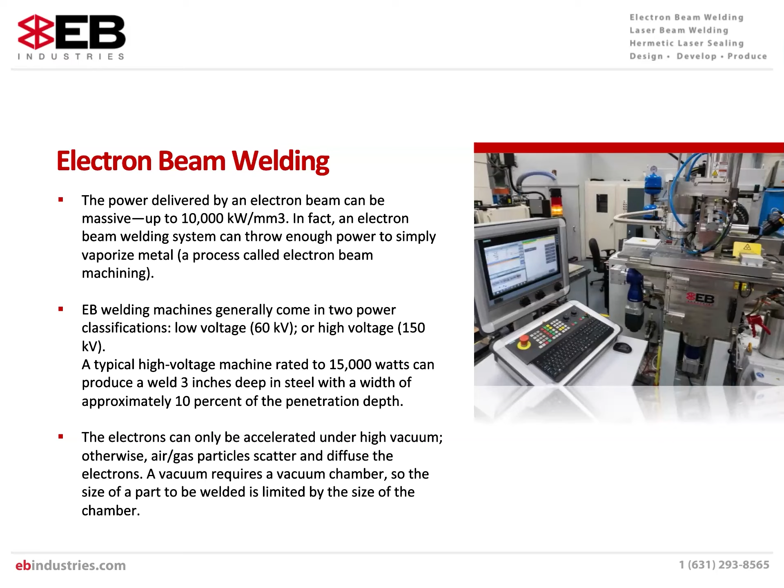The use of the vacuum, as well as the ability to eliminate the scattering of electrons and oxidation materials that can damage the weld itself, also produces radiation. That is why the handling must be done inside of a chamber, which is typically controlled externally using CNC tables.

So the EB welding, because of all this technology, the high voltage machine and the vacuum chamber itself, must be done with a well-trained and skilled operator, along with an engineer and an inspector. There are also typically maintenance technicians that we have on staff to make sure that the machines are operating efficiently and limiting downtime as much as possible.

These machines are typically in the millions of dollars, and the support to keep these machines running is very extensive, especially if you are relying on outside vendors to help with the maintenance of your machines. So when you have jobs that are as critical as ours, that are required to be delivered immediately, we cannot afford to have our machines down, which is why we have several engineers on staff working around the clock to keep our machines up and running and maintained properly.

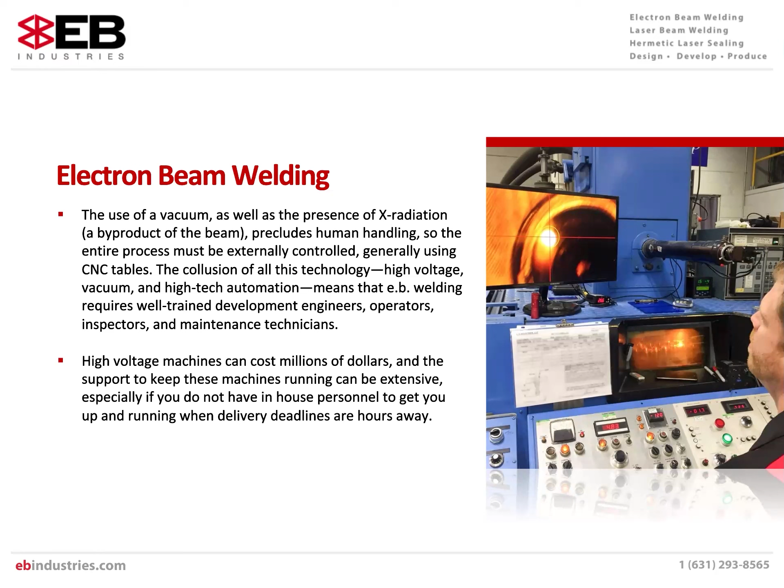To summarize the science of electron beam welding: free electrons flow through a tungsten filament. This is done under vacuum by accelerating the electrons with a high voltage power source. Their path is controlled through magnetic lenses that can deflect the beam or control the shape by controlling the diameter, done through a narrow adjustable cone. By colliding the electrons with metal, the kinetic energy is transferred into heat on the workpiece, therefore producing a weld.

The success and quality of the final weldment depends on proper joint design. Along with the joint design, we also have to make sure that the tooling is made with proper design limitations, because the ability to manipulate the part inside of the vacuum chamber is very, very critical. The tooling also acts as a heat sink to minimize shrinkage and warping by controlling the heat going into the part. The tooling can also be designed to shield and protect exposed wires and sensitive components against vapor and weld splatter.

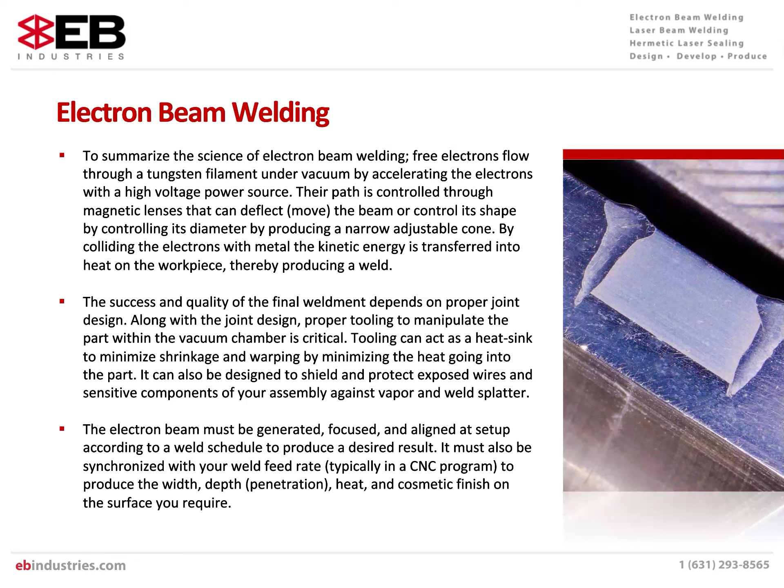The electron beam must be generated, focused, and aligned at setup according to a weld schedule, which is developed to produce the desired result, always designed by customer specifications. It must also be synchronized with things like feed rate to produce the width and depth, which is the penetration, as well as the heat input and cosmetic finish of the surface that you need.

Electron beam welding is a process that is very good and skilled at joining dissimilar metals that would typically be otherwise unweldable due to differences in melting points, which results in intermetallic compounds that cause brittleness.

When you have dissimilar metals and you're welding them with other processes, you might experience things like cracking because the melting points are different and they shrink and expand at different rates. The precise nature of the electron beam and tight heat affected area allow electron beam welding to melt the lower temperature material onto the unmelted higher temperature material, resulting in a homogeneous weld.

An electron beam can be very precisely placed, and the weld can retain up to 97% of the original strength of the material. That is also a benefit when we are not having to use filler material, which is typically used in other processes like TIG and MIG welding.

Only once one cycle is complete and all parts in the chamber are electron beam welded does a technician or operator unload the welded parts for inspection and load another batch until the order is complete. Electron beam welding systems can weld all weldable metals, as well as some metals that are not typically weldable.

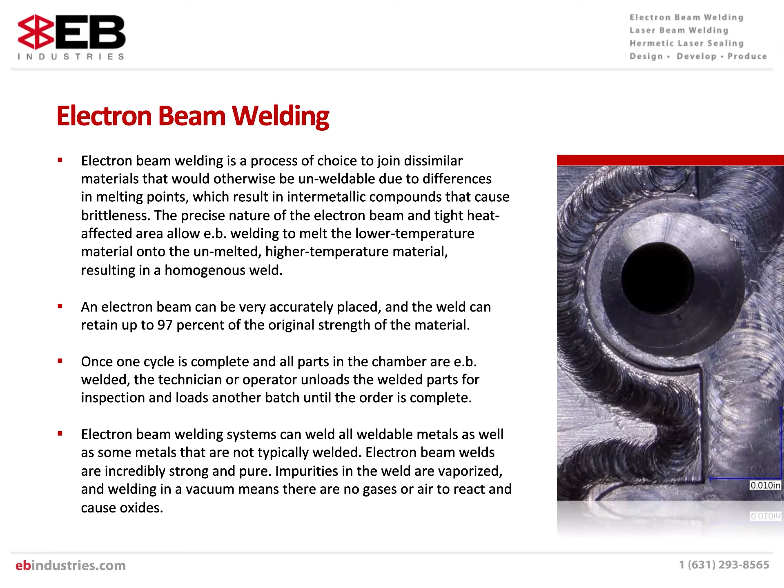Electron beam welds are incredibly strong and pure. Impurities in the weld are vaporized, and welding in a vacuum means that there are no gases or air to react and cause oxides. Oxides typically lead to things like cracking.

Now we're going to talk about laser beam welding. Laser welding systems can deliver a tremendous amount of energy very quickly and with pinpoint accuracy. The beam can be focused and reflected to target hard-to-access welds, and it can be sent down a fiber optic cable to provide a more homogeneous weld.

A laser beam is generated by rapidly raising and lowering the energy state of an optical gain material, such as a gas or a crystal, which causes the emission of photons. Regardless of how the photons are produced, they are concentrated and made coherent, meaning they are lined up in phase with each other, and then projected.

The photons are focused on the surface of a part. Radiant heat couples the material, causing it to melt via conduction. Since the heating of the material starts on the surface and then flows down into the material, the depth of penetration per unit of power in a laser weld is less than that of an electron beam weld.

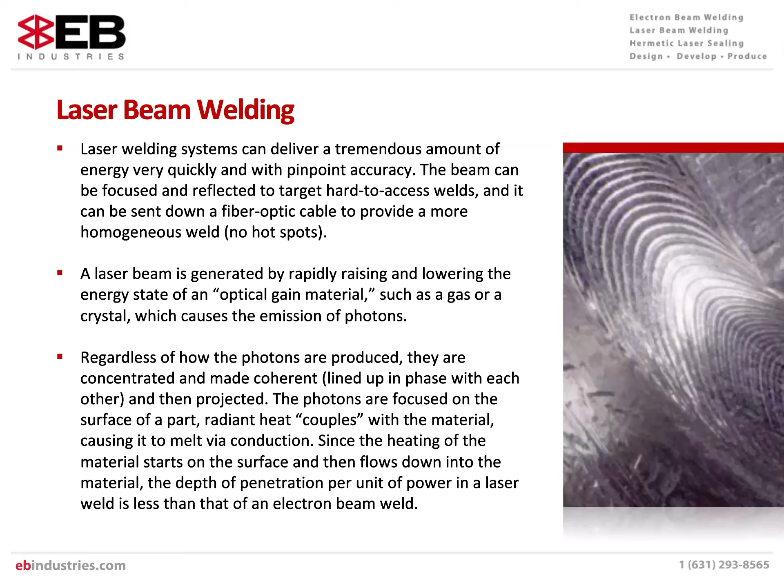Most of the power of a laser weld is wasted on heat and reflected off the surface. To overcome this problem, the laser can be pulsed, varying the power of the laser over time during the weld cycle. By pulsing the laser at high peak powers, the average power can be a fraction of the peak power, and the part stays cool.

On highly reflective materials such as copper and aluminum, the peak power is used to break the surface and cause weld coupling. The power output of a laser can vary from a few watts to hundreds of kilowatts, and different types of lasers have different welding characteristics.

As an example, the wavelength of light produced by the laser can make it more suitable for some applications and less for others. Laser welding generally requires the use of a cover gas to keep oxygen out of the weld area and improve efficiency and weld purity. The type of gas used depends on the type of laser, the material being welded, and the application.

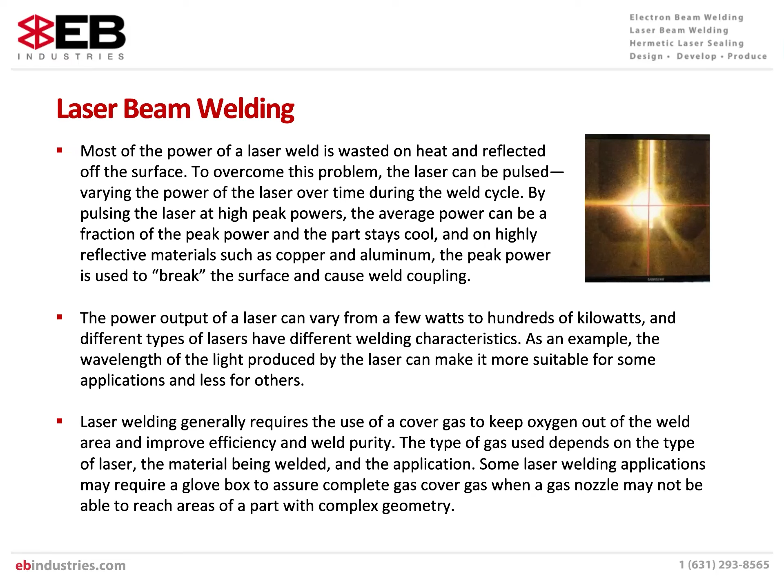Some laser welding applications may require a glove box to ensure complete gas coverage when a gas nozzle may not be able to reach areas of a part with complex geometry.

The alternative to pulsed welding is continuous wave laser welding. As the name implies, continuous wave lasers utilize a laser beam that is on continuously from the start to the end of the weld cycle. Continuous wave lasers are useful for cutting applications or when weld speed is important.

For example, an automated TIG machine might have a welding speed of 10 inches per minute, while a CW laser can easily run at 100 inches per minute. When laser welding, high feed rates for continuous wave is necessary to keep the part cool, so heating-sensitive parts often use pulse welding when possible.

This makes them a good choice for welding electronics packages, particularly those that are hermetically sealed. Minimal heat means that the weld can occur extremely close to sensitive electronic components and soldered joints without melting them.

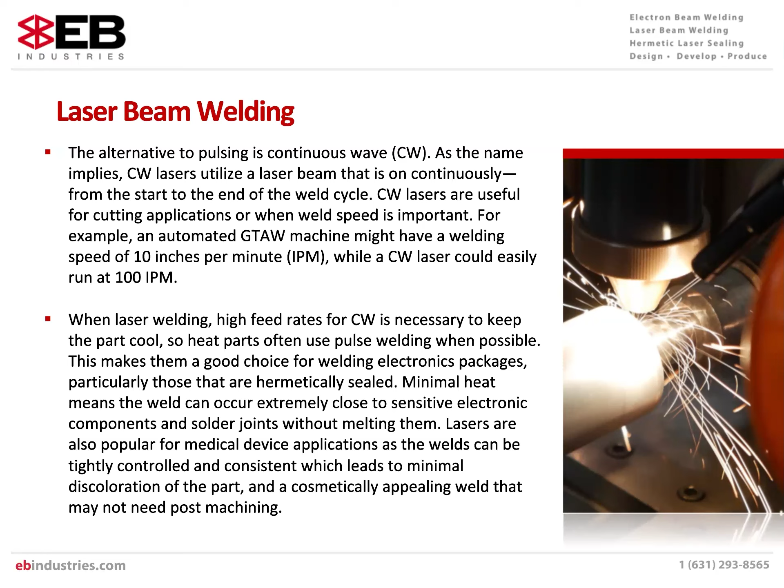Lasers are also very popular for medical device applications, as the weld can be tightly controlled and consistent, which leads to minimal discoloration of the part and a cosmetically appealing weld that may not need post-weld machining. The third process we're going to talk about is called laser hermetic sealing.

Electronic circuits exposed to corrosive conditions or required to have extreme performance characteristics are sealed hermetically into special packages. Epoxy gluing, resistance welding, soldering, electron beam welding, and laser welding are several other techniques available for sealing these packages.

The disadvantage in the use of epoxies is that they often do not create a hermetic seal. Moisture migrates through the epoxy, destroying its hermetic seal.

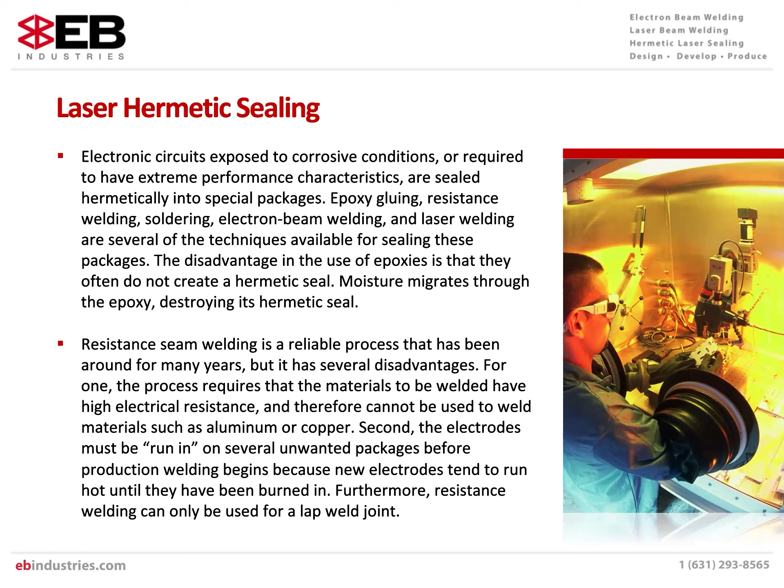Resistance seam welding is a reliable process that has been around for many years, but it has several disadvantages. For one, the process requires the materials to be welded have high electrical resistance, and therefore it cannot be used to weld materials such as aluminum or copper. Second, the electrodes must be run in on several unwanted packages before production welding begins, because new electrodes tend to run hot until they've been burned in. Furthermore, resistance welding can only be used for a lap weld joint.

Problems develop when solder sealing is attempted on larger packages. The process requires the whole assembly to be heated, and the use of low melting temperature alloys may result in the materials not being fully welded.

Electron beam welding has many of the same advantages as laser welding, but electron beam welding systems require vacuum chambers, X-ray shielding, and a fill of inert gas after welding, with another sealing operation by conventional means after that.

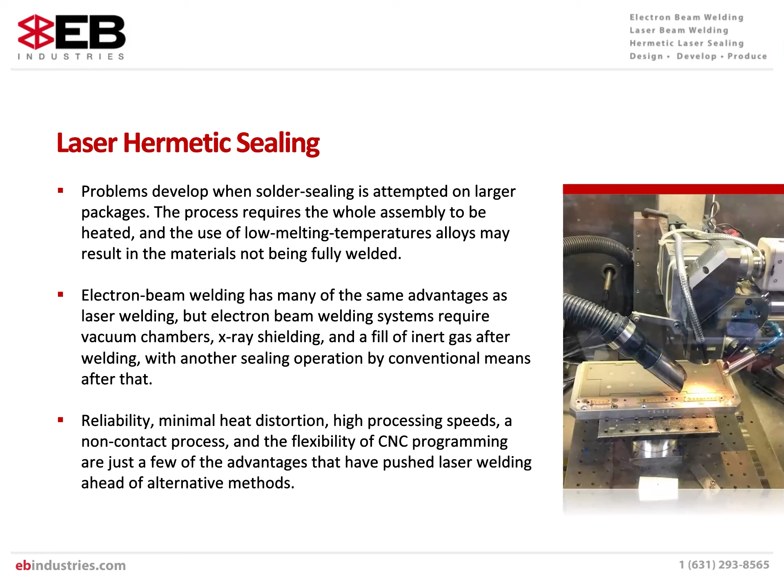Reliability, minimal heat distortion, high processing speeds, a non-contact process, and the flexibility of CNC programming are just a few of the advantages that have pushed laser welding ahead of alternative methods.

Typical weld penetrations can be adjusted within a range from 10 thousandths to 60 thousandths of an inch, depending on the configuration of the weld joint.

The heat input to the part is kept to a minimum because of the laser's ability to deliver the power in precise locations. Depending on the type of material, some heat is conducted through the part from the weld zone, but the losses are minimal.

Reflection losses also occur, especially in materials such as aluminum, copper, and gold. Initial reflection loss is high, but the first part of the laser pulse melts the surface, and absorption by this molten material can be up to 20 times greater than absorption by the solid state.

The welding is typically performed in an inert atmosphere, usually consisting of a mixture that is 90% nitrogen and 10% helium with less than 100 parts per million of moisture and oxygen. This keeps the weld free of contaminants.

Because the inert atmosphere is contained within the package, the helium can be used as a tracer gas for leak detection, eliminating post-weld pressure bombing.

A slow flow cover gas should also be supplied through the beam delivery nozzle or through a side jet to keep debris from being deposited on the focusing lens.

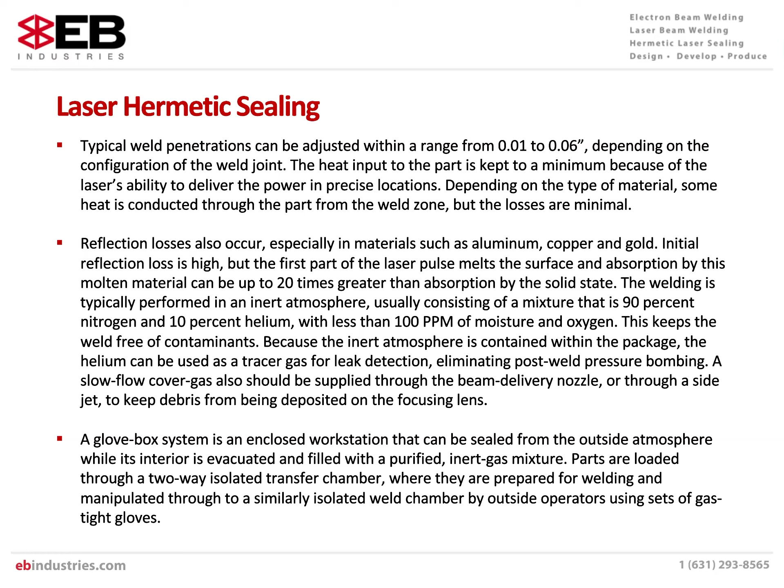A glove box system is an enclosed workstation that can be sealed from the outside atmosphere while its interior is evacuated and filled with a purified inert gas mixture. Parts are loaded through a two-way isolated transfer chamber where they are prepared for welding and manipulated through to a similarly isolated weld chamber by outside operators using sets of gas-tight gloves.

Electron beam and laser welding are fusion processes that can produce high-energy precision welds in a wide range of metals, including exotic and dissimilar metals that are hard to weld by conventional welding processes.

Other types of fusion welding, such as arc tungsten inert gas, typically referred to as TIG welding, or metal inert gas, typically referred to as MIG welding, might be an option. But if your requirement is for precision, energy efficient, deep yet narrow, pure welds, because no filler material is typically required, then electron beam or laser welding are often the best methods of joining.

Because the physical components that generate electron beams and laser beams can be CNC controlled, you have a highly repeatable, versatile joining technology capable of welding both the smallest implantable medical devices, and yet also deliver the tremendous amounts of power required to weld large aircraft parts.

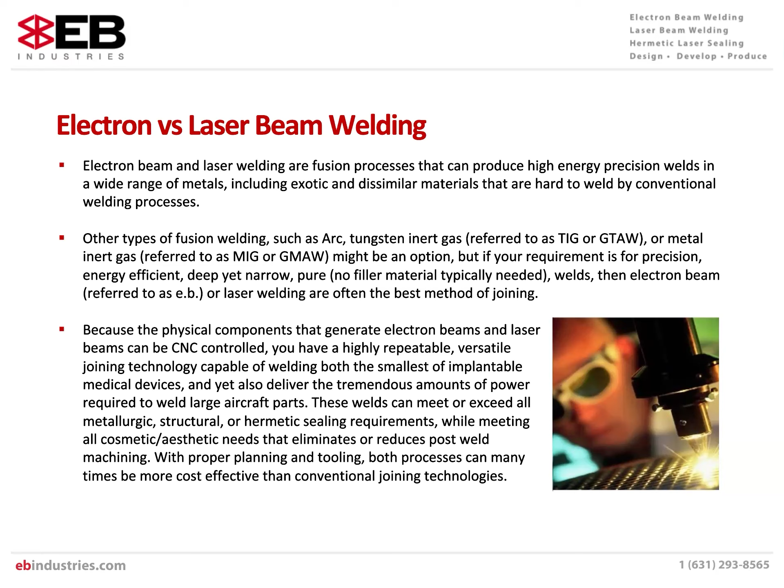These welds can meet or exceed all metallurgic, structural, or hermetic sealing requirements while meeting all cosmetic needs, eliminating or reducing post-weld machining. With proper planning and tooling, both processes can many times be more cost-effective than conventional joining technologies. Here we have a chart that compares some of the typical things to consider when choosing one of these processes.

I would recommend giving some time here to pause the video to look at this chart. It's very important and has a lot of critical information here.

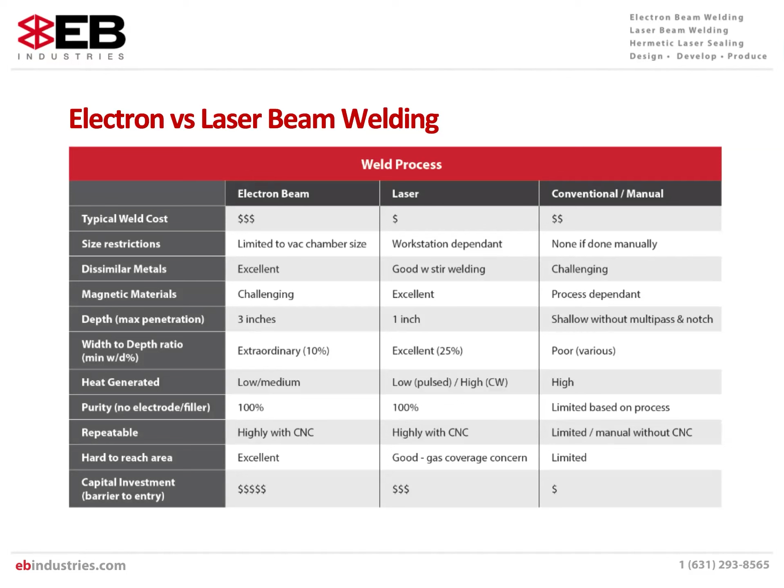Now, which one to choose? Which process is best usually depends on the application. Electron beam welding was an accepted process in the aerospace industry before lasers were available. As a result, the specifications for EB welding for aerospace parts are complete and widely accepted. These specifications control all aspects of the process, including joint design, cleaning, vacuum requirements, machine qualification, operator training, and inspection criteria. Without the requirement for vacuum, laser welding is generally less expensive than electron beam welding.

Other assemblies may have specific requirements that will dictate the process to use. By working closely with an experienced weld or development engineer, we'll help you decide the right process for your application.

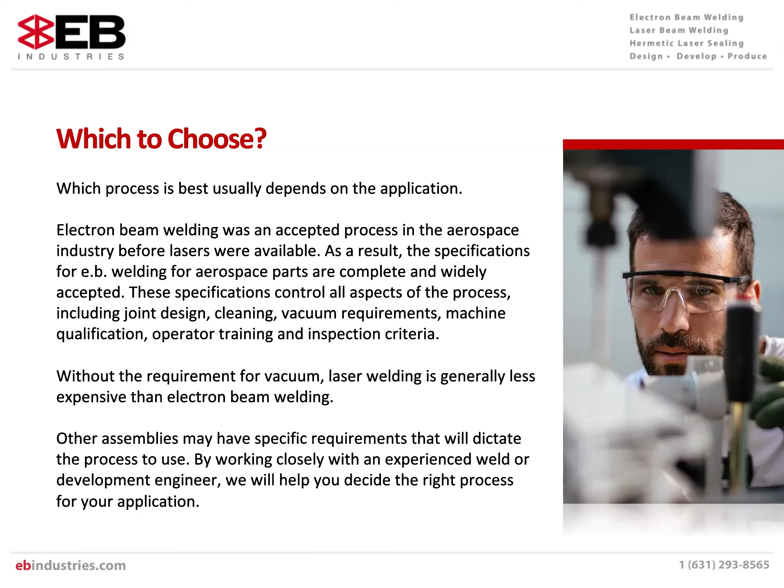Now, just to give a little background on EB Industries: EB Industries is a full-service provider of electron beam welding, laser welding, and laser hermetic services, as well as a contract manufacturing company with a large network for value-added processes. We have been around since 1965. We have the ability to meet unique requirements of component fabrication companies by helping customers design, develop, and produce welded assemblies. EB Industries also provides and manages additional services to produce complete assemblies.

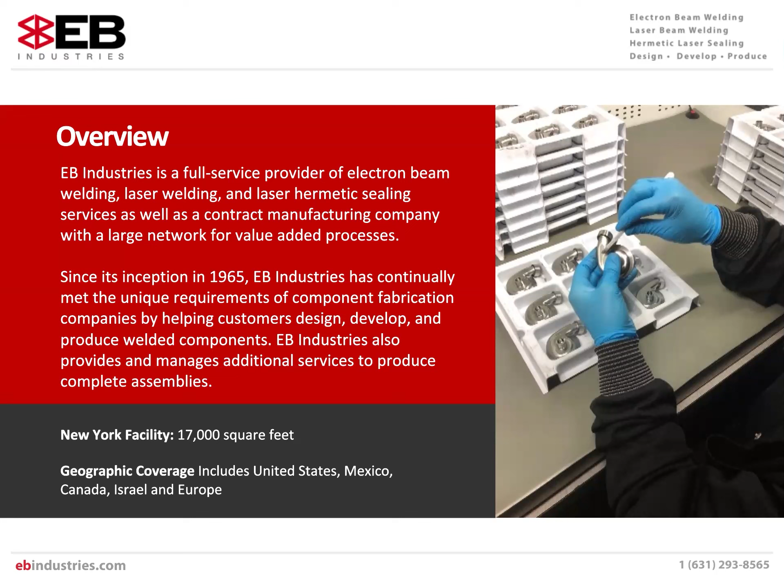We are located in Long Island, New York, in a 17,000 square foot facility. We cover all of the United States, Mexico, Canada, Israel, and many parts of Europe.

Now, what do we do? Our customers rely on EB Industries as a single source solution for designing and developing difficult-to-weld parts and assemblies, as well as producing them in a long-term production setting. We help customers design with 50 years of history of solving the most difficult precision welding challenges. We have experienced engineers on staff, knowledgeable in joint design, metallurgy, and manufacturing. We also have CAD, CAM, and solid modeling capabilities.

We also do a lot of work with development. We have a large selection of several different electron beam and laser welding technologies under one roof. We have a fully equipped machine shop for fabrication and tooling. We have an on-site metal testing laboratory. We do all of our own cross-sectioning and metallurgical analysis on site, as well as a full network of suppliers and service providers to take on additional drawing requirements.

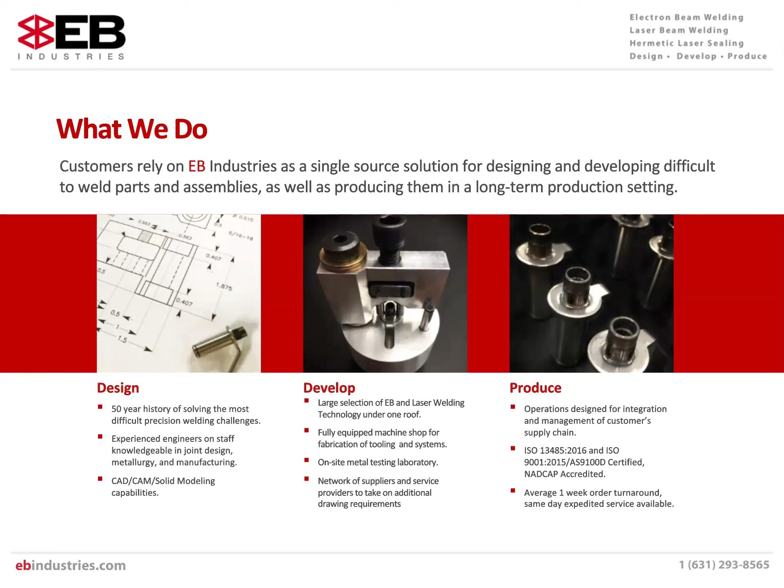And of course, the final goal for all projects is production, which we do have operations designed for integration and management of customer supply chains. We are ISO 13485, ISO 9001/AS9100 certified, and we are also NADCAP accredited for electron beam welding. We typically average around a week or two for order turnarounds, with expedited services available upon request.

Now, for our capabilities: we have 4 high voltage EB welders, with a 5th one that will be online in the next month or so. We have 1 low voltage electron beam welder. Our max chamber size is 36 by 36 by 72 inches. We have 5-axis CNC control on several of our EB machines, and we also have optional real-time parameter monitoring on some of our machines as well.

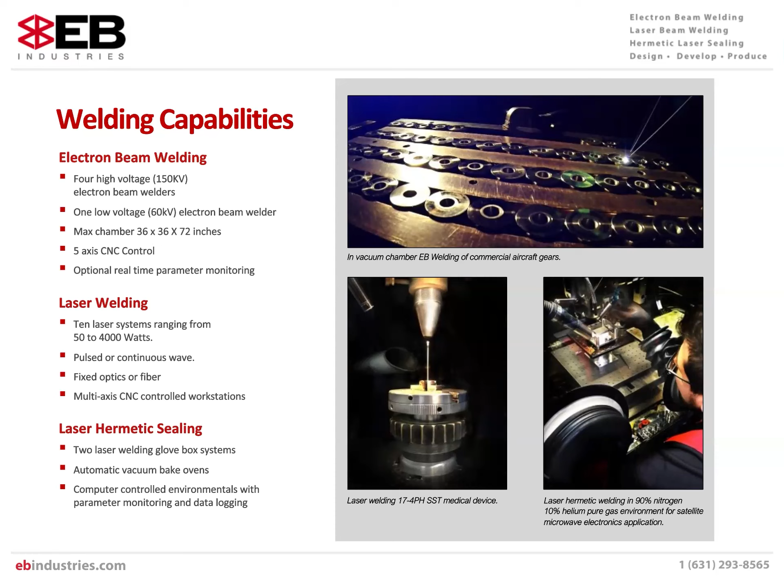On the laser welding side, we have 10 laser welding systems that range from 50 watts to 4,000 watts. We have pulse lasers and continuous wave lasers, fixed optics and fiber optics, as well as multi-axis CNC control workstations for each. Now, for laser hermetic sealing, we have 2 laser welding glove box systems. They have automatic vacuum bake ovens that can be programmed to have the right vacuum bake profile required by the customer, and these environments are also computer controlled with parameter monitoring and data log. You can see just a picture on the right of all 3 of the processes in production.

Now, along with our core competencies, we also offer a suite of supporting services. Our services focus on our core competency of precision welding and engineering and associated services. On the engineering side of things, we do weld engineering and joint design.

We do tool design and fabrication. We can help with system designing and development. We also do material and component sourcing as well as metallurgical evaluation.

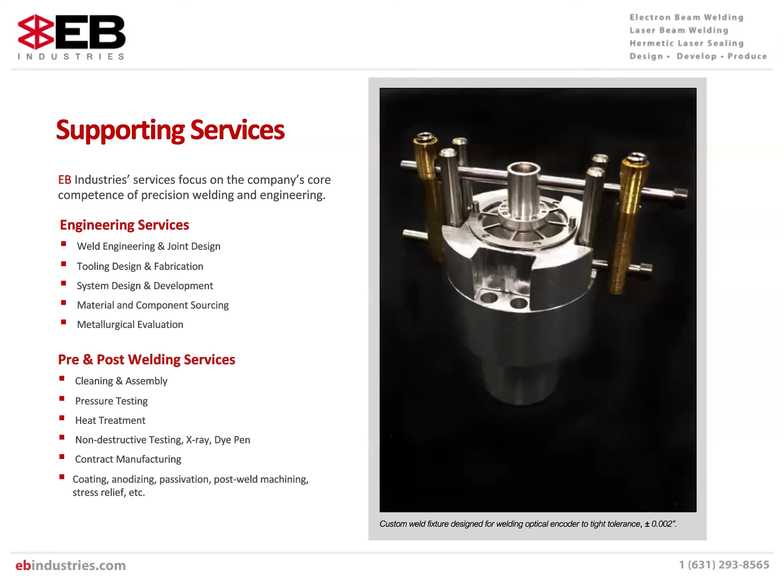Now, for our pre and post welding services, we offer services such as cleaning and assembly, pressure testing, heat treatment, NDT such as X-ray, dye pen, mag particle, and others. We also perform contract manufacturing as well as supply chain management, as well as things like coating, anodizing, passivation, post-weld machining, and stress relief.

For quality, we employ a unique quality management system designed to provide high-quality work product that meets the varied requirements of its customers and industries served. As a result, EB Industries is on the approved supplier list for many large OEMs and Tier 1 suppliers.

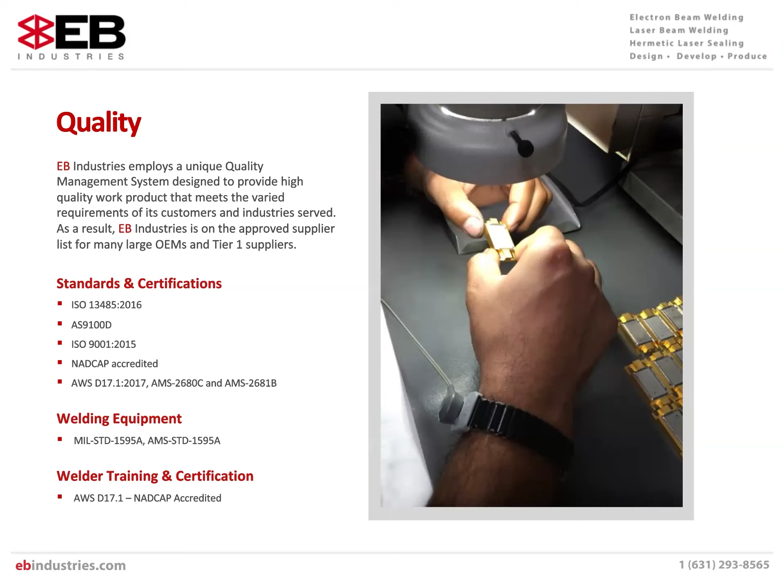And just to repeat some of the certifications that we have, we are ISO 13485, AS9100, ISO 9001, NADCAP accredited for electron beam welding, and we weld to AWS D17.1, AMS 2680, AMS 2681, and other specifications upon request. Our equipment is all certified to MIL Standard 1595A, and our welders on the electron beam welding side are all trained to AWS D17.1, which is a NADCAP accredited process.

We support many industries. Aerospace, space, and defense is our most popular industry, the one our company was really started based on. We provide services for commercial and military aircraft, aircraft engines, rockets, satellites, submersible componentry, sensors and controls, ordnance, and weapon systems.

In the medical device industry, we provide services to manufacturers of medical instruments, surgical tools, implantable devices, artificial joints, and dental appliances. We also manage the manufacturing and supply chain processes needed to make a complete assembly.

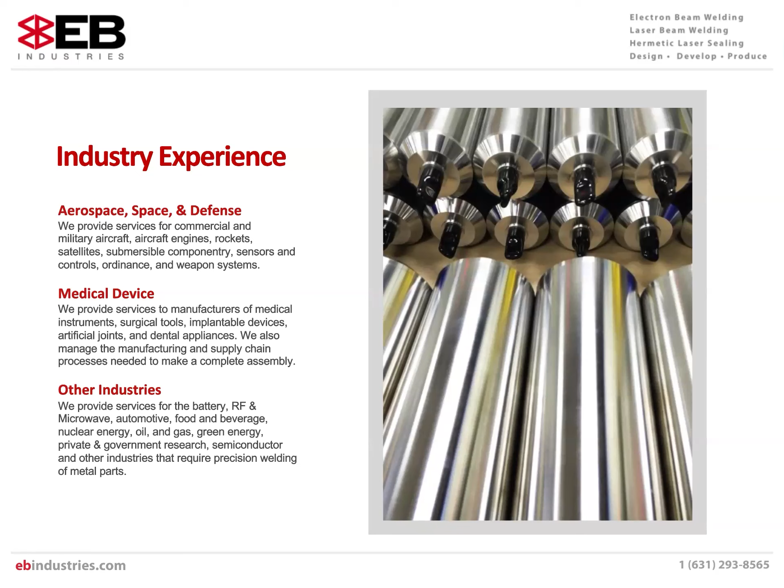Now, outside of those industries, we also support the battery industry, RF and microwave, automotive, food and beverage, nuclear energy, oil and gas, green energy, private and government research, semiconductor, and other industries that require precision welding of metal parts.

Now, what is EB Industries' difference? The first difference we have over our competitors is quick turnarounds. We offer same and next day expedited services, being that we're at the end of the supply chain with parts that have already been manufactured, assembled, coated, passivated, things like that. We understand that delays occur before parts arrive here, so we work with our customers to help make up for lost time in the supply chain.

We also offer engineering consultation. We provide complimentary engineering consultation to help support weld joint design as well as part design. This provides our customers the highest chance of success and helps alleviate a lot of lost time in the design phase from the customer, and lost money in terms of producing prototype designs that may not be applicable for our welding processes.

Our third difference is our quality. We are certified to many industry specifications that were listed earlier, as well as being NADCAP approved for electron beam welding. We are also listed on a number of approved supplier lists for large OEMs that can be provided as required.

Now, for some services that we plan on offering in the future, the first one is TIG welding. We are expanding our welding services to offer TIG welding. This will allow us to support a larger scale of manufacturing projects outside of those that we can typically handle today.

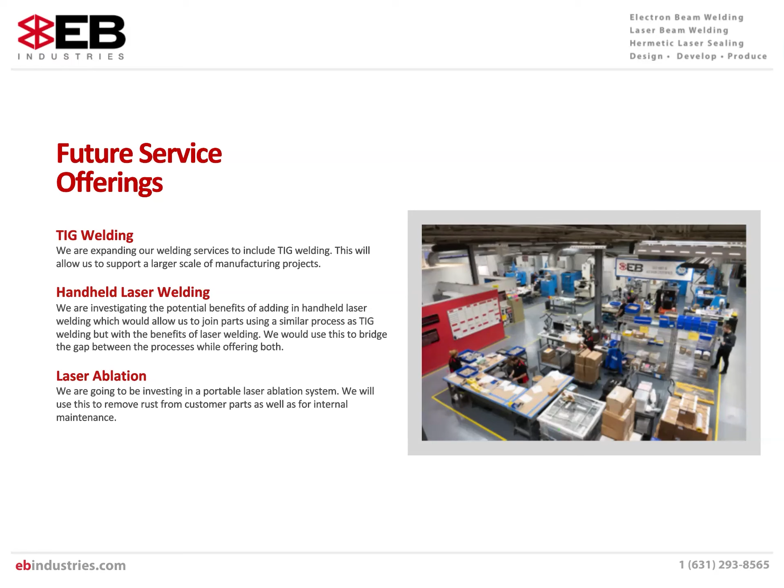We are also looking into handheld laser welding, to see if we could potentially merge the benefits of laser welding with a manual process such as TIG welding. This will allow us to bridge the processes between both. And we are also offering laser ablation, which we have a portable laser ablation system that is used to remove rust from customer parts, as well as to be used for internal maintenance.